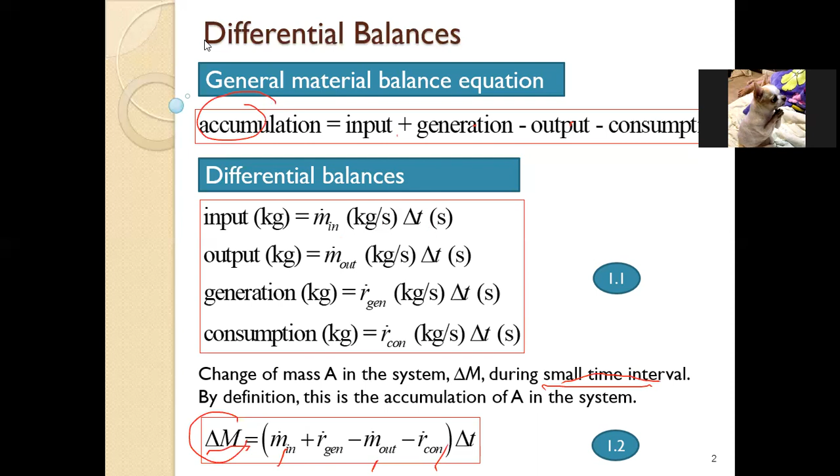And then if we divide this both sides, we set this to divide by delta t, you get delta M divided by delta t. And delta M means m at t plus delta t minus m at t, divided by delta t.

And if you take the limit, using the calculus you study in calculus one, you take the definition of the limit as delta t approaches zero. If the time interval is very small, delta t approaches zero, this is the definition of derivative: the limit of m at t plus delta t minus m at t, divided by delta t.

This is the derivative, dm by dt, equal to m in plus generation minus m out minus consumption. This is the general equation for unsteady or transient mass balance. The change of mass with respect to time equals the rate of mass in, plus the rate of generation, minus the rate of mass out, minus the rate of consumption. This is the accumulation term: it is positive when there is an increase, and negative when the mass decreases or depletes with respect to time. This equation is called a first order ordinary differential equation, or first order ODE, which we study in calculus 1, 2, 3 starting in the first year.

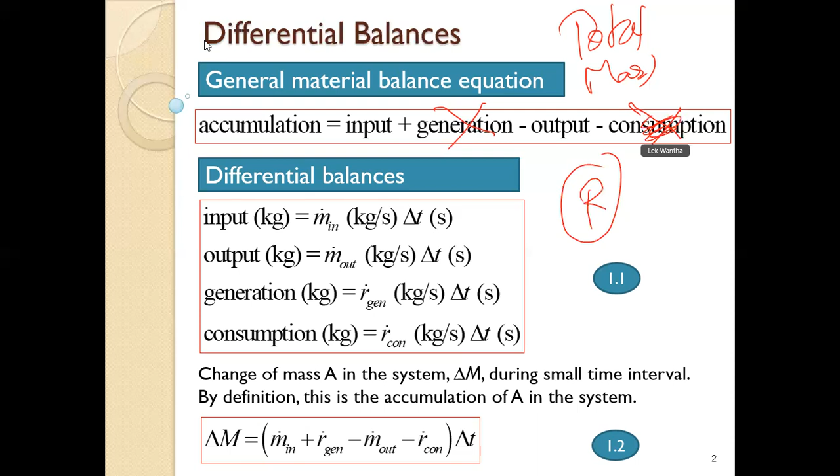For this we will talk about the total mass first. For total mass, there is no generation, no consumption, so accumulation equals input minus output. Okay, we consider this.

Mass in reactor, we define as M in grams. The mass of the substance equals the volume of the liquid multiplied by the density of the liquid. V is the volume of the liquid multiplied by density, liter multiplied by gram per liter, you get gram. This is the mass in the liquid.

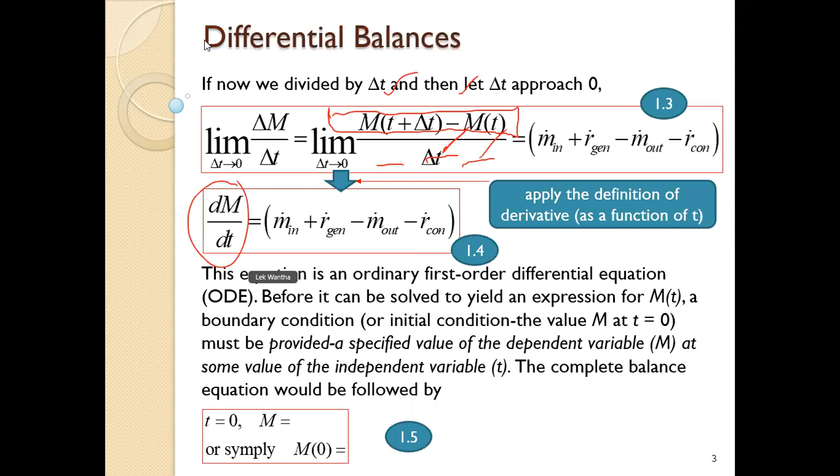And then you define the accumulation term. Accumulation term is mass per second. This is the change of mass with respect to time, dm/dt. The first term, accumulation, equals dm/dt. What is it? M is V times density, so it's d(V·density)/dt.

If we know from the assumption that density is constant, you can move density out of the derivative. You get density times dV/dt. This is the accumulation term.

And the second term is input. Input, we look at it also as gram per liter, gram per second. So this is the unit of dm/dt — m is mass, t is time, mass per time. The accumulation is mass per time, and input is also mass per time. This is the input term.

It should be volumetric flow. V0 is liter per second, multiplied by density, gram per liter. This is the input. How about the output? Output should be volumetric flow multiplied by density as well.

You substitute all three terms into this equation. You get density times dV/dt equals V0 times density minus V times density. But for this case, density is constant, so you can cancel density out. You get dV/dt equals V0 minus V.

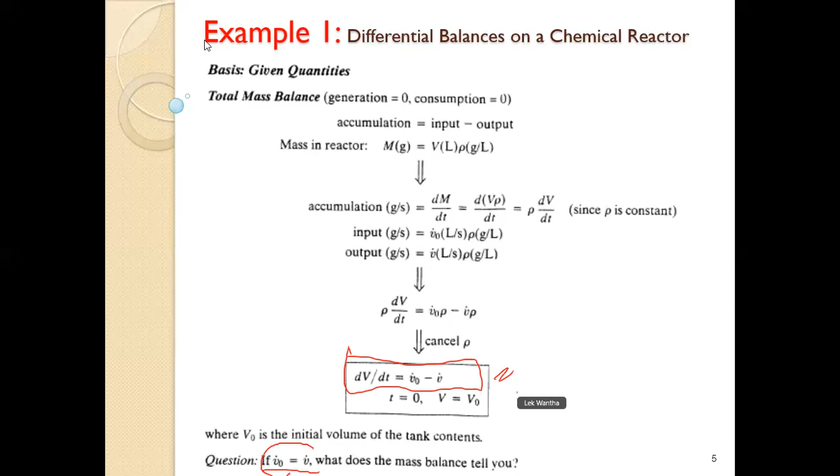Okay, next we talk about the mass A balance, balance on mass A. For this case, there is no generation, because this is the reactant. No generation, generation is for product. So you get accumulation equal to input minus output minus consumption.

Moles of A is the reactant: volume multiply CA, volume of the liquid multiply concentration of A. Later you get more A, and then you can express the term of accumulation as dVCA by dt. This is the accumulation, because we talk about VCA as the mass or mole of A in the reactor. The accumulation of A in the reactor is dVCA by dt.

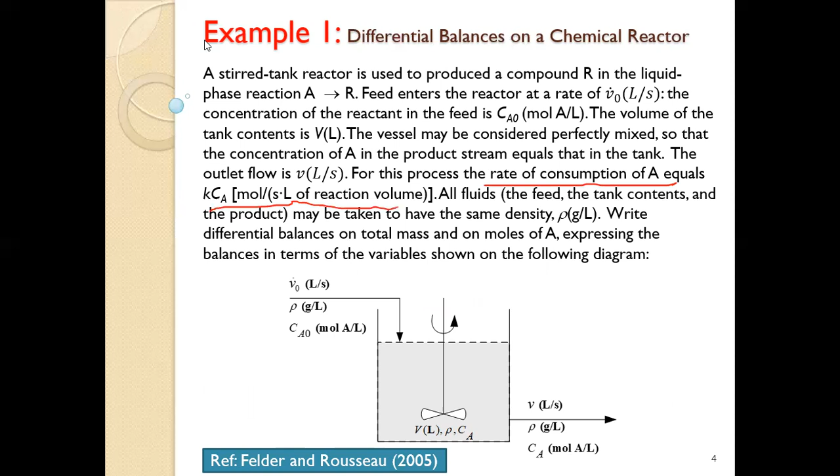The next term, input: V0 multiplied by CA0. Output: V multiplied by C. And consumption: KCA multiplied by V, because from the problem statement, the rate of consumption equal to KCA. But the unit is mole per second per liter of the reactor volume, so first we have to multiply by V.

That has to multiply. Okay, now you substitute this whole term into this equation: dVCA by dt equal to V0CA0 minus VCA minus KCAV. This is the differential equation for the mass balance of reactant. Accumulation equal to input minus output minus consumption. And for this case, if you would like to solve this equation, you have to know the initial condition.

You have to know the concentration at time 0: CA equal to CA at time 0. What is the concentration at initial time, at time equal to 0? If you know this, you can solve for this equation.

Right now, you write the general equation for total mass. This is for total mass, this is for mass balance on reactant. You can solve it for product also. You can express the mass balance of the reactant and total mass with respect to volume, with respect to flow rate, with respect to K. K is the reaction constant, with respect to inlet concentration. This is the outlet concentration.

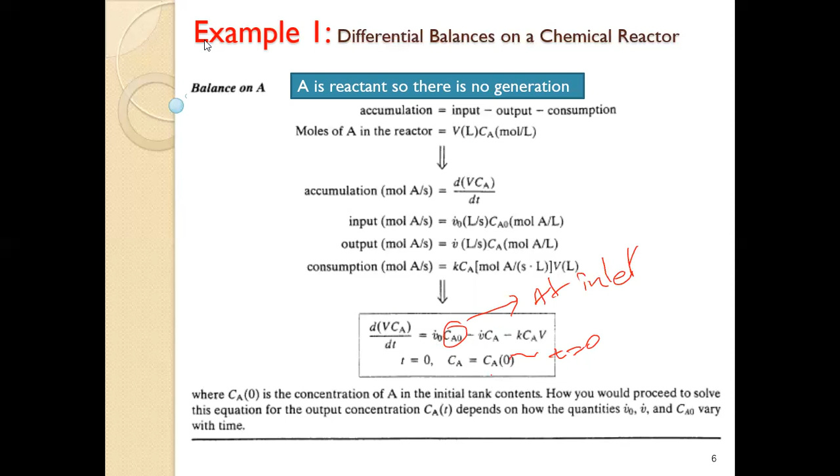Okay, next we can define the transient equation in terms of the integral balance. Previously, we talked about differential balance. If you consider the integral, you can look at the differential equation.

The differential equation, and then you multiply both sides with dt. And so you get dm equal to m-in dt plus r-gen dt minus m-out dt minus r-con dt. This is the integration from initial time to the later time. You can integrate from initial time to the later time, for example, you integrate from t0 to tf.

You take the integration. Integrate dm, you get m(tf) minus m(t0) equal to the integral from t0 to tf of m-in, plus the integral of r-gen, minus the integral of m-out, minus the integral of r-con. This is the integral form or integral balance.

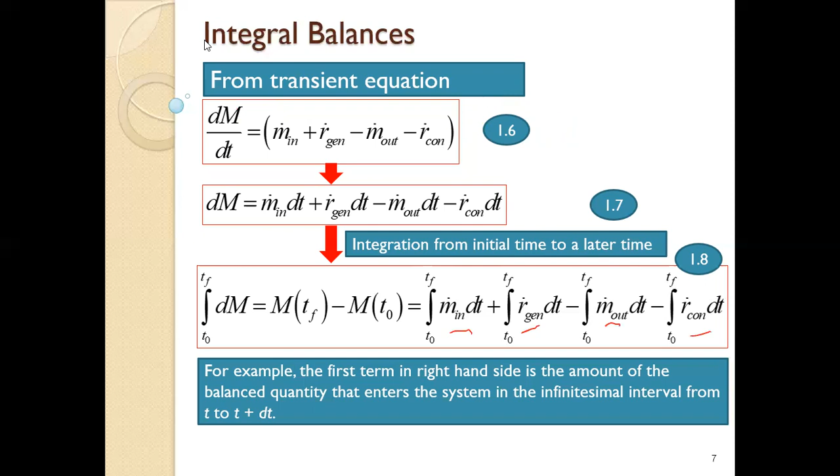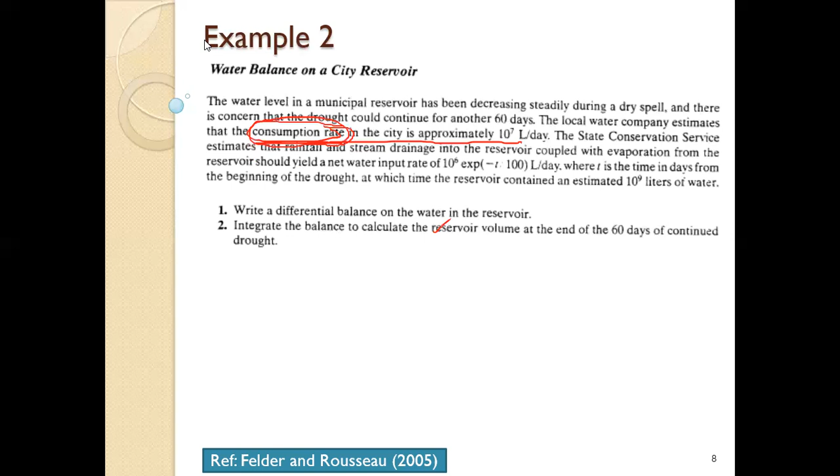This consumption term is not the rate of consumption, but the rate of water flow out to the community. This term means the flow of water out to the community, not consumption based on use. You see that for this case, there is no reaction, no generation, no consumption, because the system is flow of water out and water accumulated. But this consumption term means the rate of municipal use of water, meaning the flow of water out to the community, not true consumption.

For this case, there is no generation and no consumption reaction term. Finally you get the equation: dV/dt equals 10 to the power 6 times the exponential of minus t, divided by 100 minus 10 to the power 7. Because the density is constant, you can cancel it.

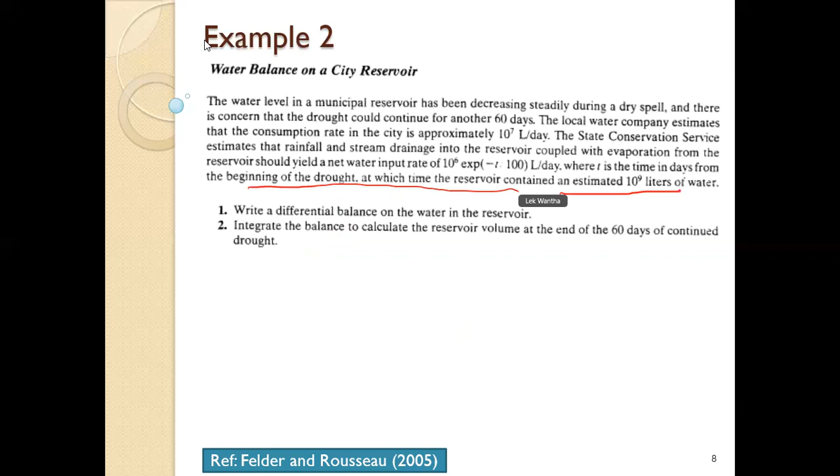From the problem statement, you know the initial water in the reservoir. At the beginning we have 10 to the power 9 liters of water, so the initial condition at time 0 is V equals 10 to the power 9 liters.

And then you can take the integration. dV equals this term times dt. You integrate from V0 to V60, from time 0 to 60. Applying the integration gives V60 minus V at time 0.

For this term, you can separate into terms: integrate 10 to the power 6 multiplied by e to the power minus t divided by 100 dt, and 10 to the power 7 dt. Integrate these two terms. You know V0, so you can solve for V. But V0 equals...

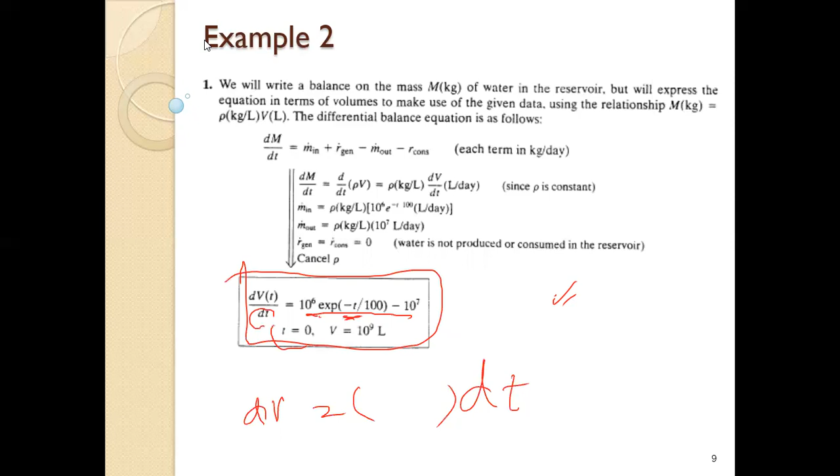So for that case, you have the differential equation. The basic technique is that you can separate the variables, so dV equals some term multiplied by dt, because all of it is constant. Then you can integrate. This is the separation of variables technique that you study in calculus.

Okay, the second example, we talk about chemical reaction. For this case, we have no chemical reaction. We have two equations for that: this one with chemical reaction, and this one with no chemical reaction.

Okay, for this case, we have a solid tank. Sometimes to make the solution clear: this tank is a 12.5 cubic meter tank being filled with water at the rate of 0.05 cubic meter per second. This is the flow of water.

Also, at the moment when the tank contains 1.2 cubic meters of water, that means at initial time, time 0, this tank includes 1.2 cubic meters of water. At the bottom, we have some tube to leak the water.

Instead, the water flows out of the tank. For this case, we know the rate of the water leak is approximately 0.0025t cubic meters per second, leaking from the tank.

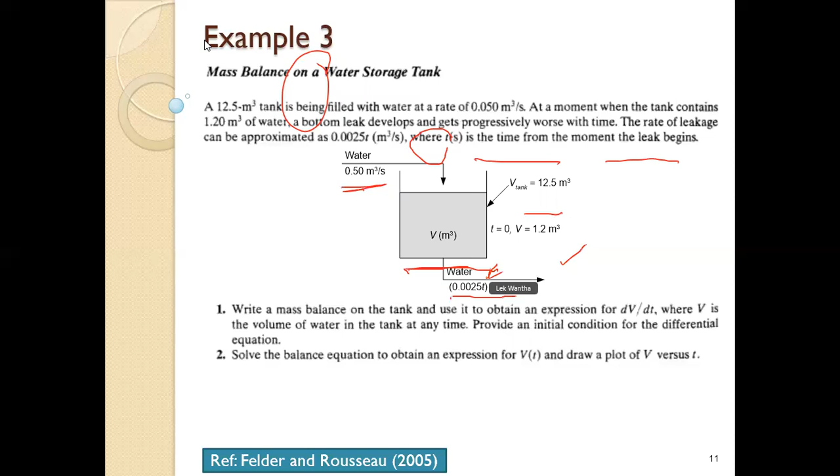Flow rate is 0.0025 multiplied by t. So rho multiplied by 0.0025 t gives you the output term. You substitute this into the equation and get dV by dt equals 0.05 minus 0.0025t. The rho is cancelled because we multiply by rho throughout.

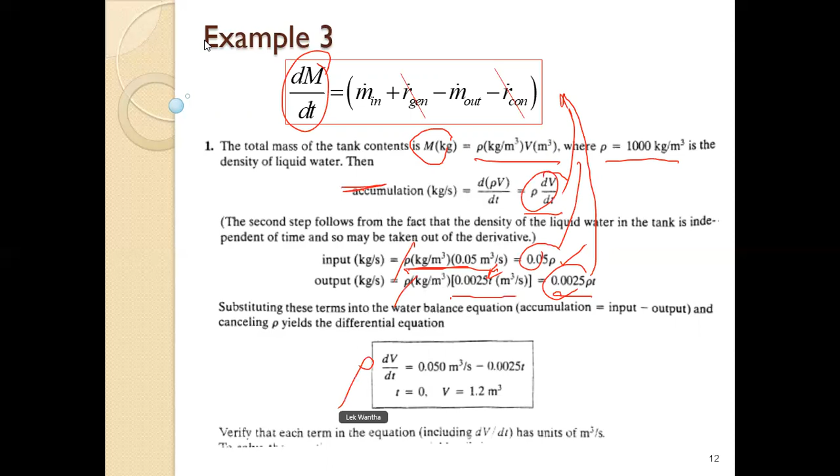So you get this equation. You also know the initial volume is 1.2 cubic meters. You know the equation, and you know the initial volume, so you can solve for it.

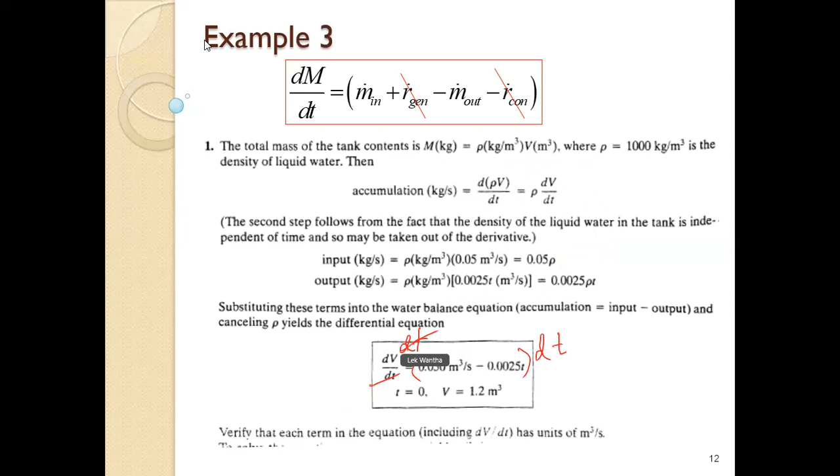From this equation, you multiply dt on both sides, and they cancel. You get dV equals (0.05 minus 0.0025t) dt. Then you can integrate from the initial volume, 1.2 cubic meters, to any V, and from time 0 to time t. I think you can integrate this — this is basic.

Integrate dV, we get integrate of the constant times dt, and integrate of t dt gives t squared divided by 2. This is the equation after you take the integration: V equals 1.2 plus 0.05t minus 0.00125t squared. This is the equation after you solve the differential equation.

For this case, at time 0, V equals 1.2, so you can check the constant. Or you can check by differentiating this equation — take dV by dt of this equation, and it should equal the original equation. If it matches, that confirms your answer.

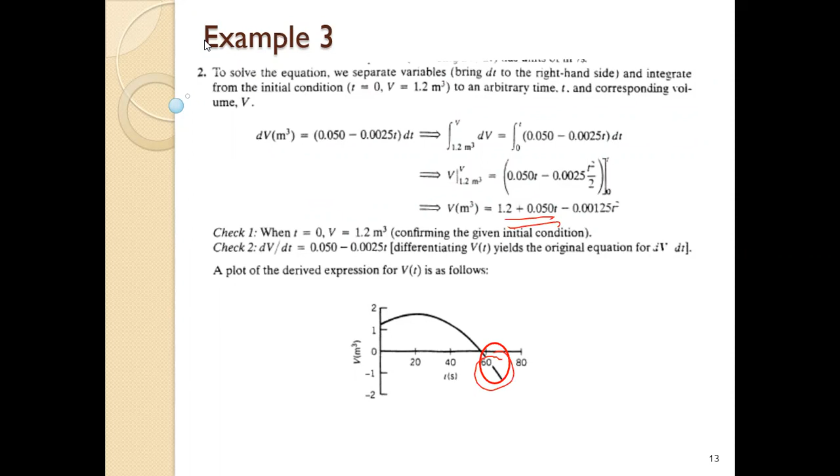At time greater than 57, the volume should be 0, not negative. So you can conclude that V equals 0 for time greater than 57. This is very important when you use mathematics — you know the math, but you have to check if it's physically possible. This is not reality, because there is no way to have negative volume, so for this case you take the answer as: the answer should be like this.

That's it — we have to note that the solution from the mass balance is only valid for time between 0 and 57; for time greater than 57, the volume should be 0. This is a very important technique: you have to check the result against the physical meaning.